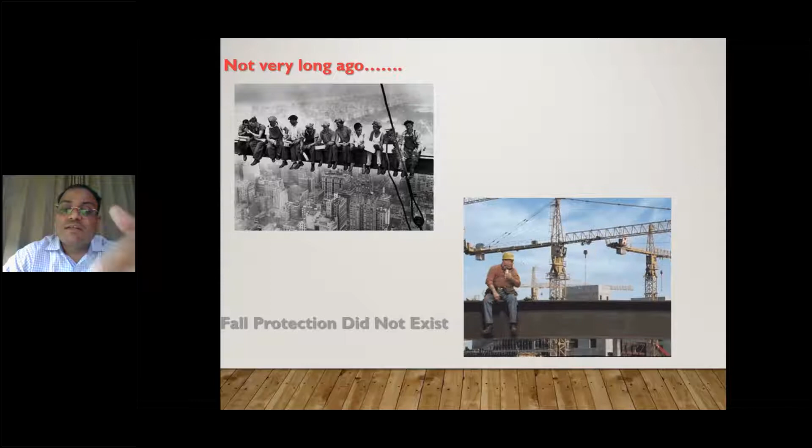I will not take the name, these are well-known places. Many of you must have seen this picture earlier. But what used to happen? There was no fall protection, you can see it in this picture. And the bottom picture, if you see the result, the outcome of that - even today, if somebody goes in that, that is what happens.

So post that, what has happened? There is development in fall protection - the connecting element, anchorage, confined space, safe work at height practices. So fall protection is nothing but ABCDE, right? When we talk about ABCDE, it's A for anchor, connecting element, body support harness, descent, and entry.

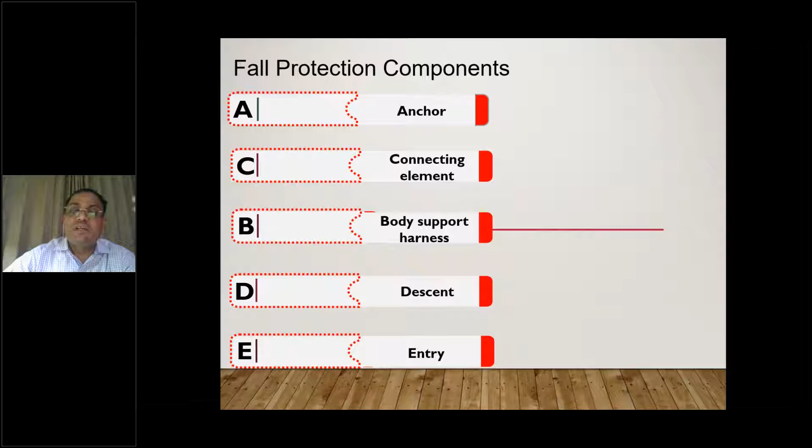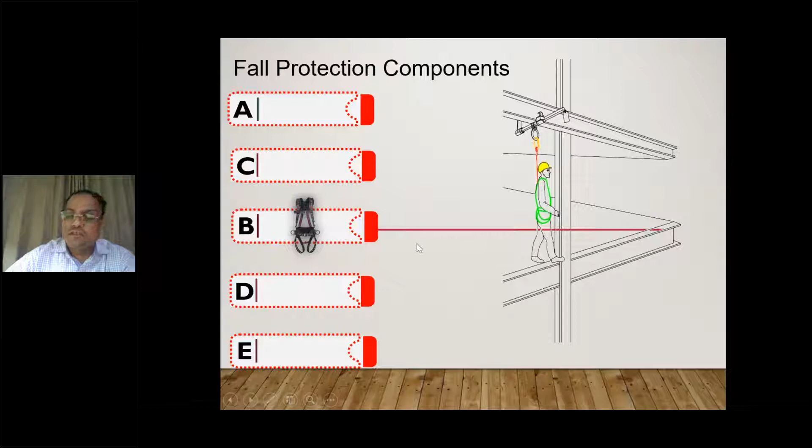That is what we will discuss principally today - what advancement has come in this kind of system. So when we talk about fall protection components, what happens? The first thing is your body support, because first and foremost is the worker who is actually working on this part, right? So he needs to have that body support.

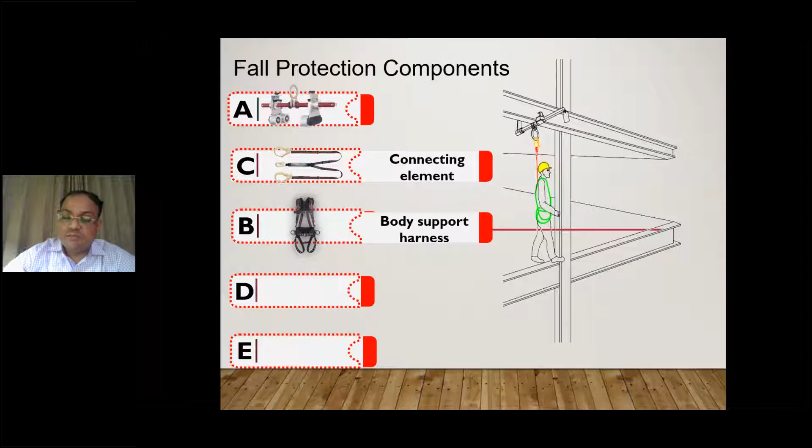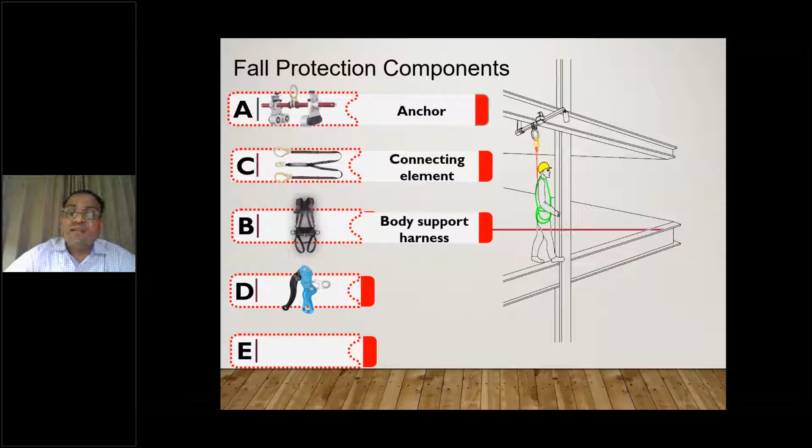So with this body support, what you need to do is attach your body. Then you go on to a connecting element. Once you put up your body support, you need to connect those body support elements, which is harness, connectors, or lanyard - that we'll discuss further. And once you have that lanyard or connecting element, what do you do? You just anchor that - so the anchoring is the third thing, and then you need to work with that.

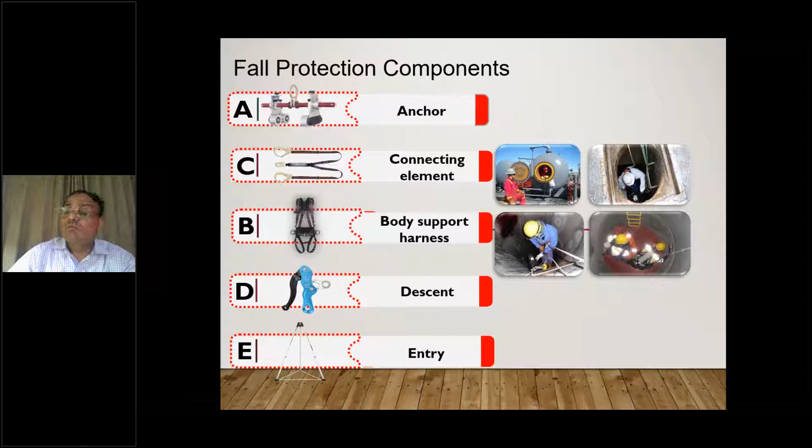So for ascent or descent, you have a descender or descent - that is again an equipment or tool. And then you have certain egress or entry point processes. So when you go in a pit or confined space, what do you do? You have to have some entry process requirement. So these are the basic fall protection components we always talk about - every one of you, I'm sure, is aware of it.

So how has the harness evolved, right? When we were talking about body elements, there is an evolution of harness, because harness is a very basic and first thing which has started, since people thought we need to connect. How to connect? That is your harness. So in this format, the first and foremost thing which came in is full body harness - of course we are not talking about rope binding, we are starting from a later stage.

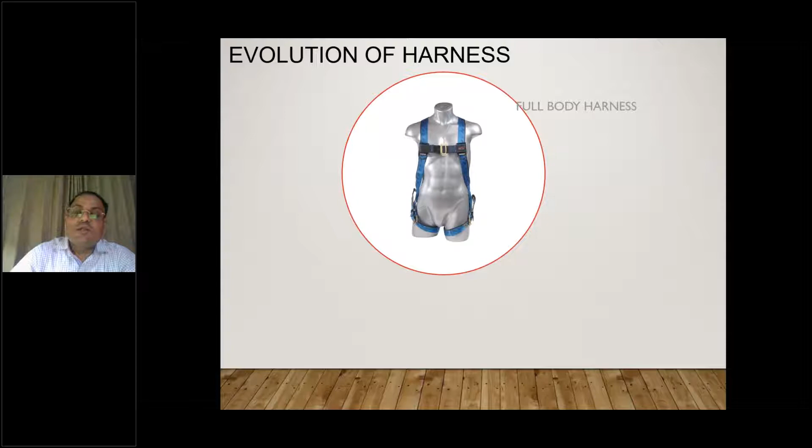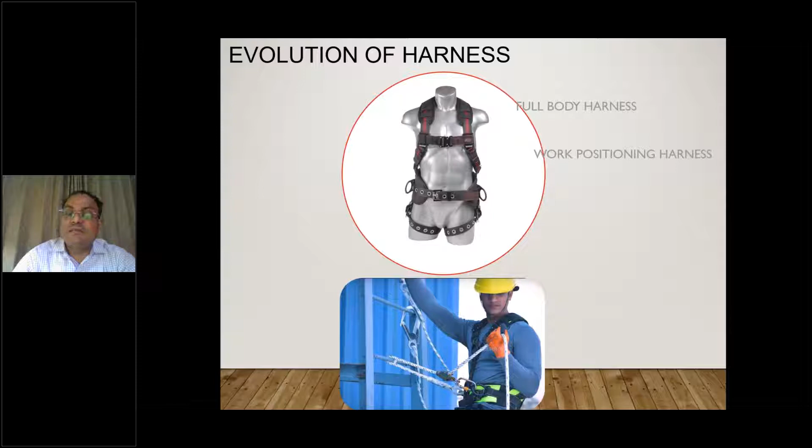Then you come to suspension harness. It means we technologically know if somebody falls, he will have some kind of trauma or some kind of jerk on his body. So if this harness has suspension, it becomes more and more safer. Then we move on to rescue harness, which means you have a rescue element also.

So when you talk about a full body harness, this is also inclusive of rescue. Until rescue things are not there - here you can see a little element which is self rescue, and even there is a connecting element which again requires assisted rescue. So there is a rescue element involved in this evolution of the harness.

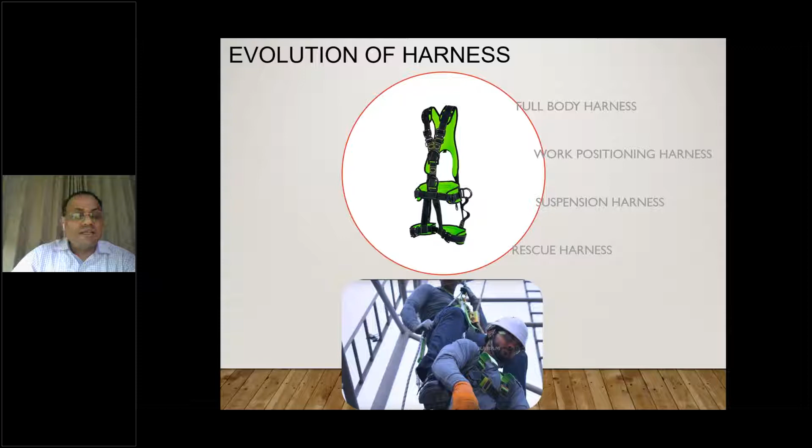Moving on with this, we have dielectric harness and flame resistant harness, which is fireproof, like for welders and other things, because people are going to work, they are not just showcasing the harness. So whatever work they are doing, it has to have adaptability with those elements - like the welding part, you see the flame resistant harness, and dielectric harness for electrocution perspective.

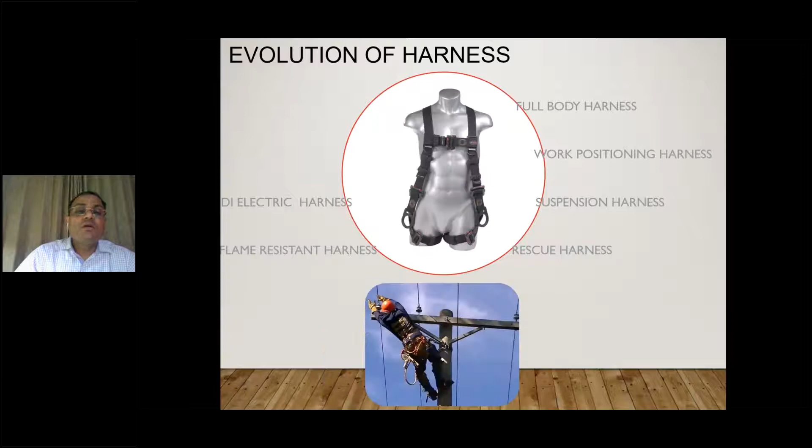Then you move on with anti-static harness, which is for the electronic area component. Wherever there is a chance of static charge and slippage, there is a possibility of anti-static harness. And last but not the least, oil resistant harness. So if you see, the harness itself has become so many things. Full body harness, right? There are 8 kinds of variants that have been developed.

Of course, many industries, many people do not buy those things, because it depends on your requirement, your need, at times the budget, your understanding, and that's why we say at least we as safety professionals must understand what this is. Okay, so if we know these things are available, at least we can choose better, right? So that is what happens when we talk about the evolution of the harness.

Moving on to the next element, which is the connecting element. In the connecting element, again there is a development or evolution that has happened. We all know the lanyard. Lanyard is a very common word now, thanks to our whole industry moving ahead. 20 years back, lanyard was hardly heard, but now lanyard is a common word. Now when we talk lanyard, there are options. First is your single lanyard. Single lanyard is simple: connecting element on one side, connecting element on the other side, connect to your body, connect to your anchor point, right? So that is how this becomes a single lanyard.

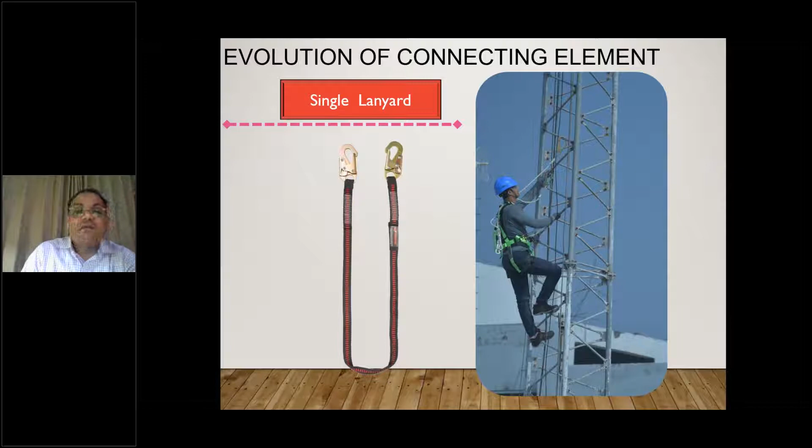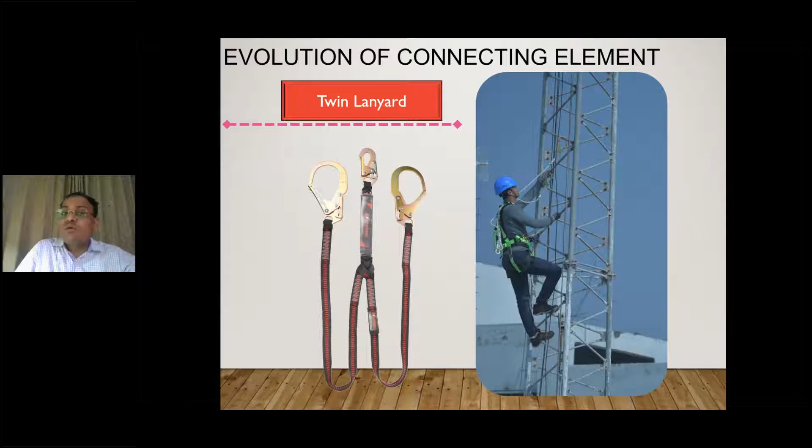Then of course the next step, twin lanyard. Twin lanyard, as the name says, has one basic connecting element to the body and 2 connecting elements to your anchor point. This is something like 3-point contact, right? So whenever you are taking out one connecting element, the scaffolding hook visible in this picture, the other is always connected. So by default you are always connected. The only difference between single lanyard and twin lanyard is you are always connected in twin lanyard, while in single lanyard for those 10 seconds or 5 seconds you are not connected and the chance of fall is much higher. Okay, so that's how we are evolving this connecting element.

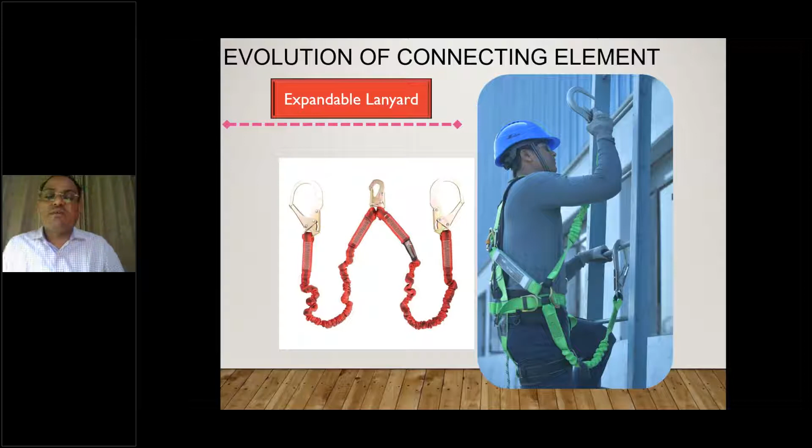Now moving on with the evolution of connecting elements, expandable lanyards also came in. Expandable means sometimes you need to stretch. So how do you maintain this stretch? Because we all know there is a standard length of this lanyard in general, which is 1.8 meter. Now if you entangle that 1.8 meter, you may have difficulty working. So this lanyard has become an expandable lanyard, so that while working in normal condition it is smaller, and when you require it, it stretches to that particular limit. Okay, so the expandable lanyard is available.

Now one more further advancement on lanyards: the internal shock absorbing lanyard. We all know a shock absorber is something which gives shock resistance to the person's body while falling. So if your lanyard itself has a shock absorber, it will protect your body from the jerk. And having two internal shock absorbing lanyards is going to be a fantastic thing for body support.

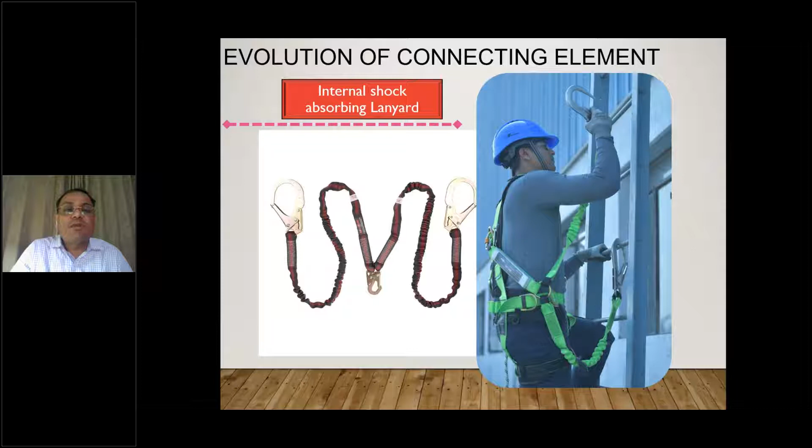So when somebody is working in an oil and grease environment, his lanyard or his harness will keep getting dusty or dirty, and then it will be very difficult to inspect. So that is a very important place where, if it is oil resistant, oil repellent or water repellent, the inspection becomes much easier on this kind of lanyard or harness. Okay. So there is that element.

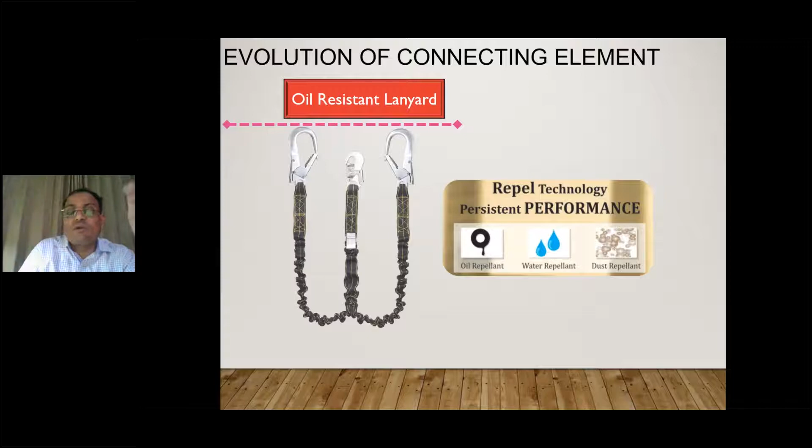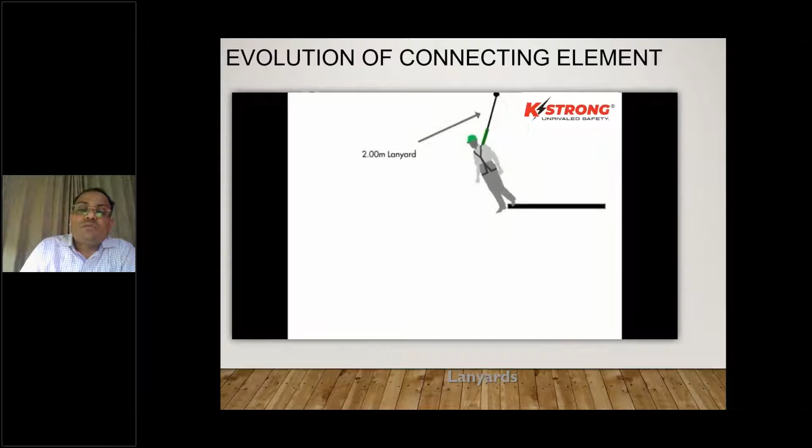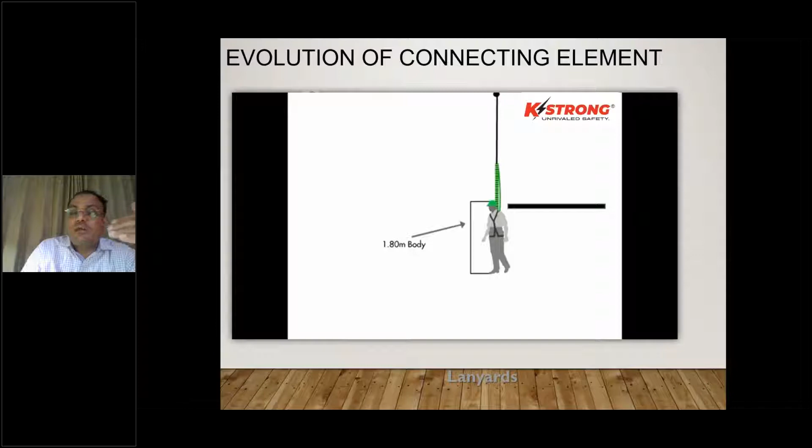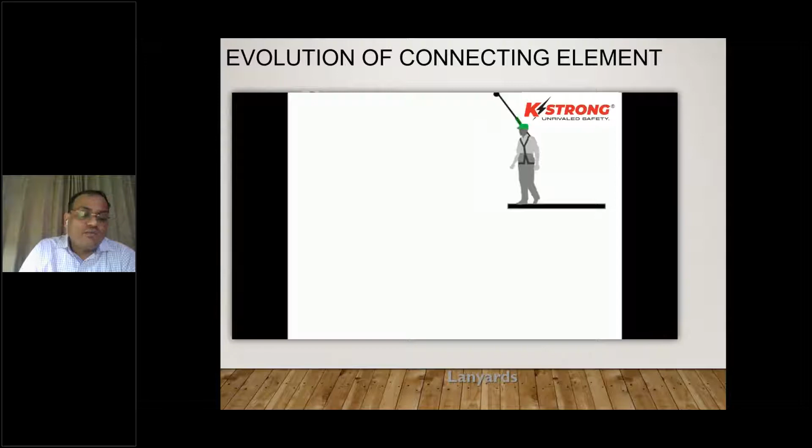Now if you see here, the connecting element, the shock absorption, this is how the shock absorber gives an edge, and this is how it helps the body, so that at least till 6 meters, if somebody falls down, he will easily get arrested. So till 6 meters your harness is good enough to protect the person. That is what we want to explain here. Moving on.

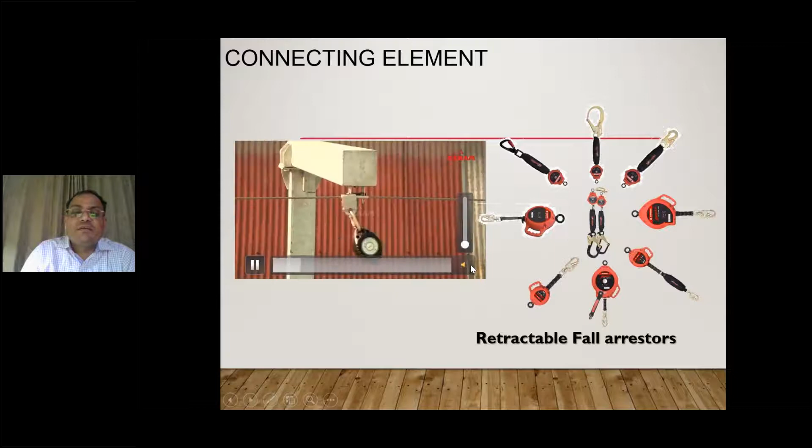So some other connecting elements, for which I will just play the video here. If you can see here, these are the horizontal lifeline overheads. Wherever you have this kind of regular work, people working should always be connected. The whole essence of these videos and pictures is that the connecting element is always critical. So be careful while you are selecting it, and in this kind of scenario you have retractable fall arresters in place, which the right side picture is showing. Moving on.

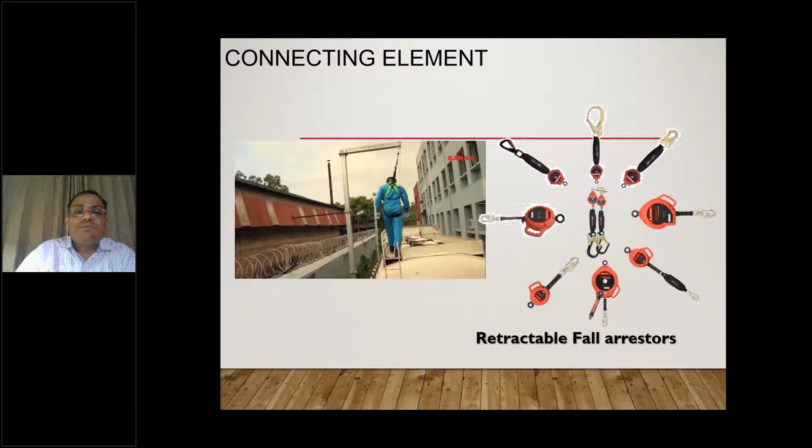Rope grab fall arresters. This is quite a common name; I'm sure most of you are aware what a rope grab fall arrester is. But there are multiple kinds of rope grab fall arresters. On a temporary basis, whenever somebody has to work at vertical heights, he needs to put up those ropes and connect with the rope grab. So rope grab fall arresters are critical in that term. Let's see how the rope grab element works through this small video. So this is how a person connects, falls down and saves himself. Moving on.

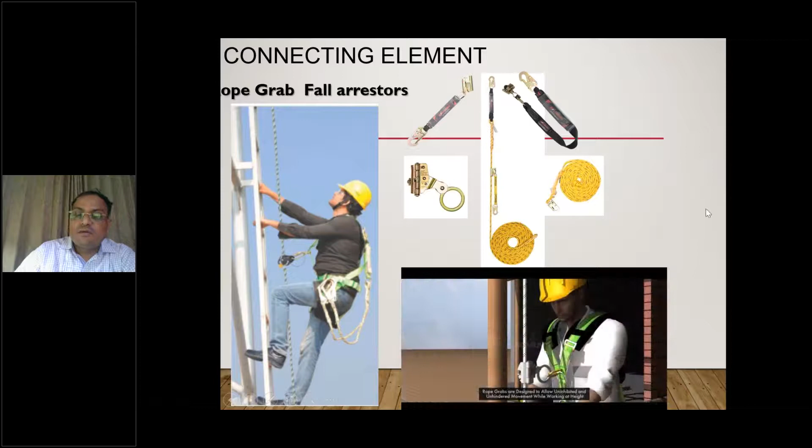When we talk about anchor points, one is the mobile anchor. A mobile anchor is a portable one, where you have a mechanism connected to a tripod or some element. Then the fixed anchor: suppose you have work of 3, 4 or 5 days, or some bigger important work, you fix those anchors in the support wall or support structure and then utilize them. And the third is the continuous anchor.

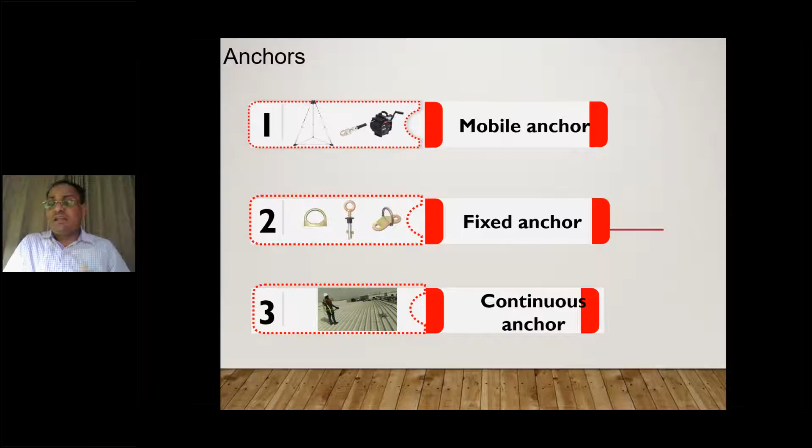There's another application, and a third one. So when we talk about mobile anchors, there are some more anchors, which are swivel anchors, door anchors, toggle, concrete bolt, which you see at the bottom, and parapet. So all options are available. Whatever problem we have, there is an option. The only thing is we have to apply it at the right place. More or less everything is available. That is what we are developing ourselves.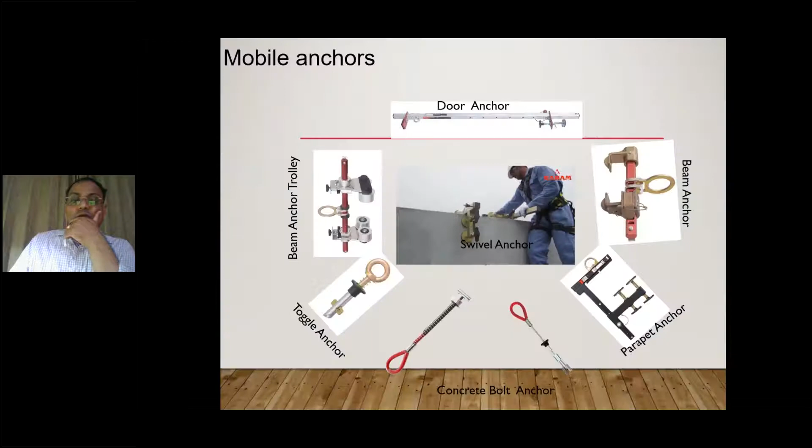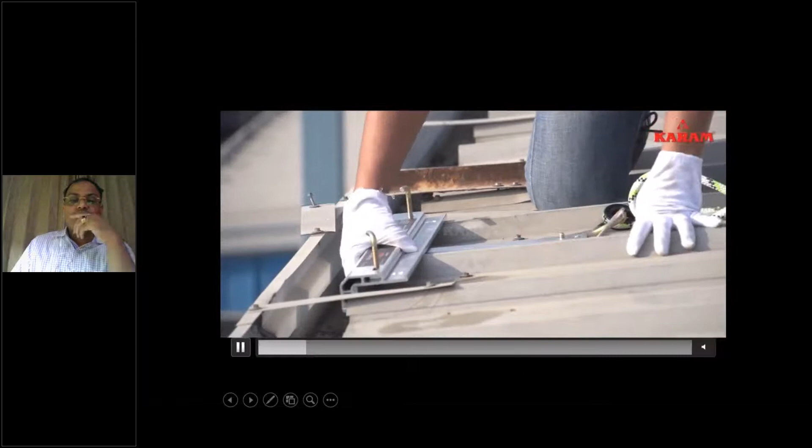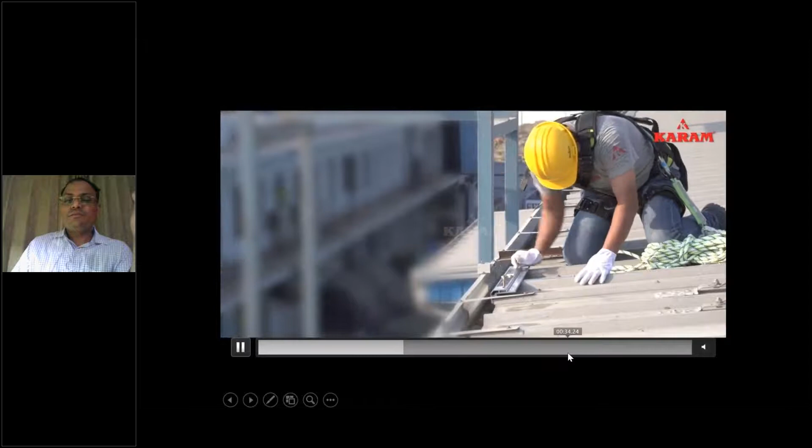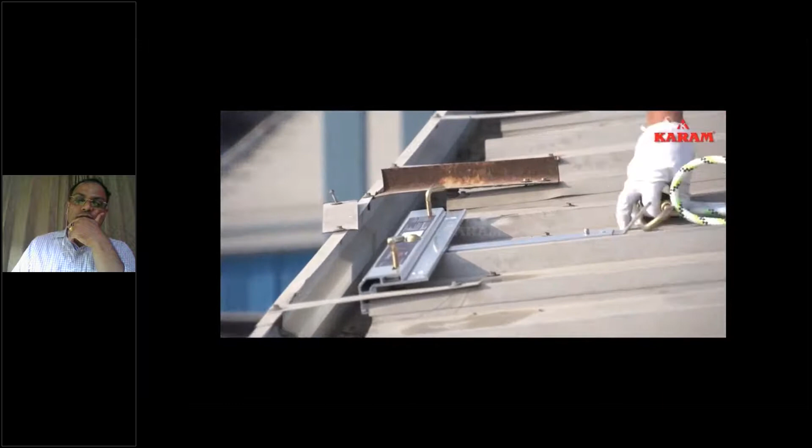So some of the mobile anchors we discussed. I'll just keep this. So you can see for all applications there are different kinds of anchors available. So that is how you can utilize those anchor points. Now I will just keep those videos.

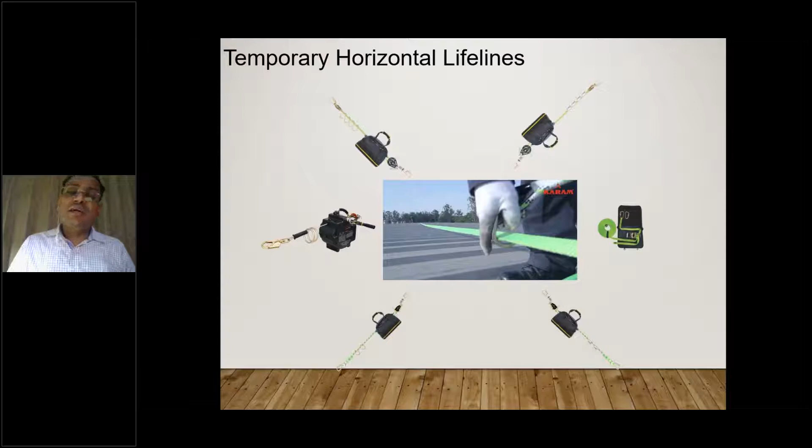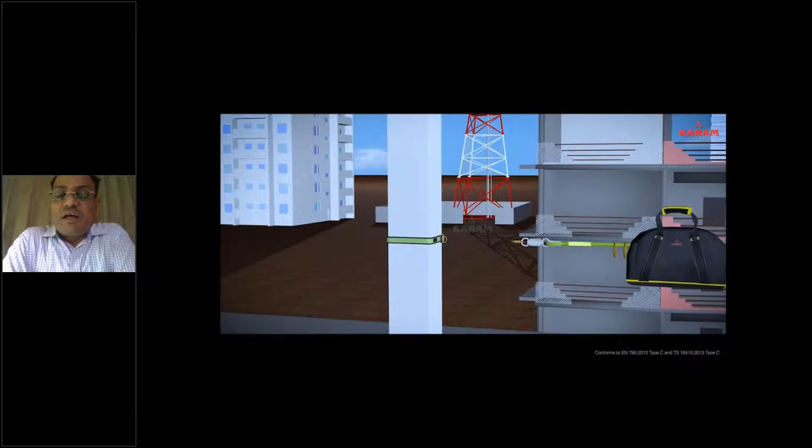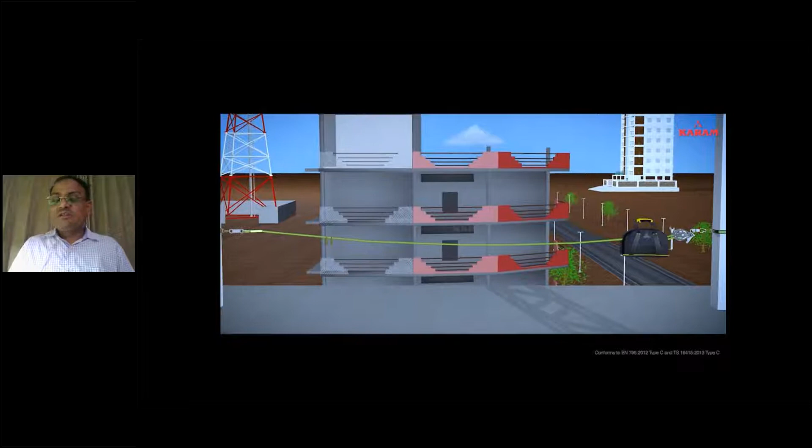Now temporary horizontal lifelines, these are also one of the anchor points. Rope anchorage lines, temporary lines; that is how you try to utilize those available anchor points. So whenever you do this mobile anchorage line, you connect them to the right structures and support points, and then you utilize those anchors accordingly. So that is how things are developing.

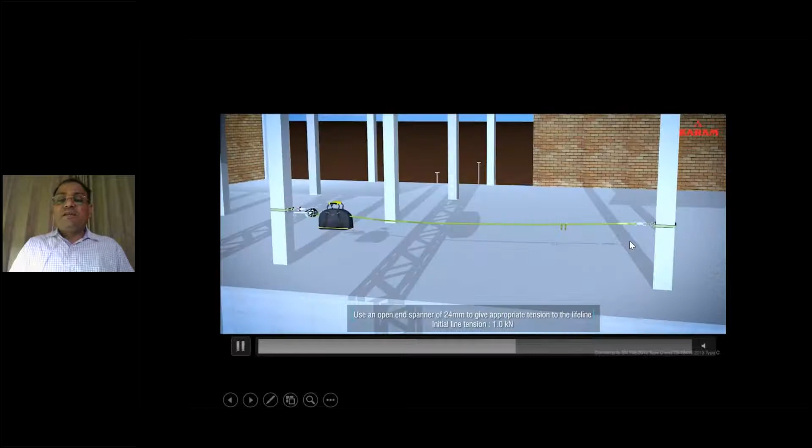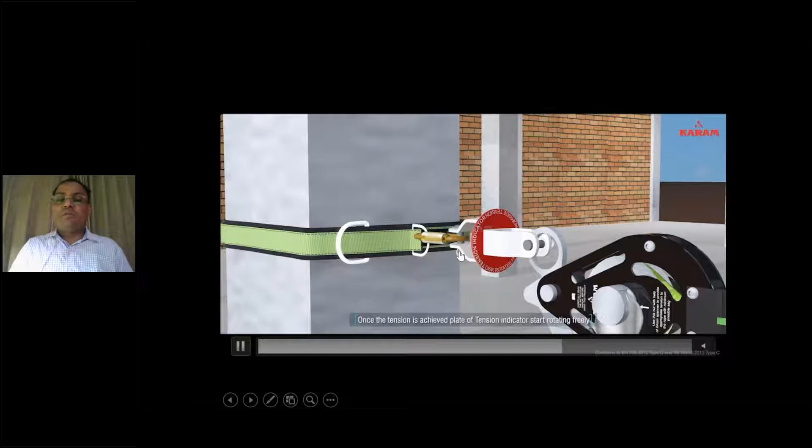Now we will talk about one more anchor, which is very important, where you have nothing. Nothing in the sense you can't have those mobile or fixed anchor points. For those applications you have dead weight anchors. This dead weight anchor is nothing but a counterweight application. A person's body weight is 80 to 100 kg most of the time, and these anchor points can easily take up to 100 kg load, or depending on the situation you can add more, because this counterweight can be increased or decreased.

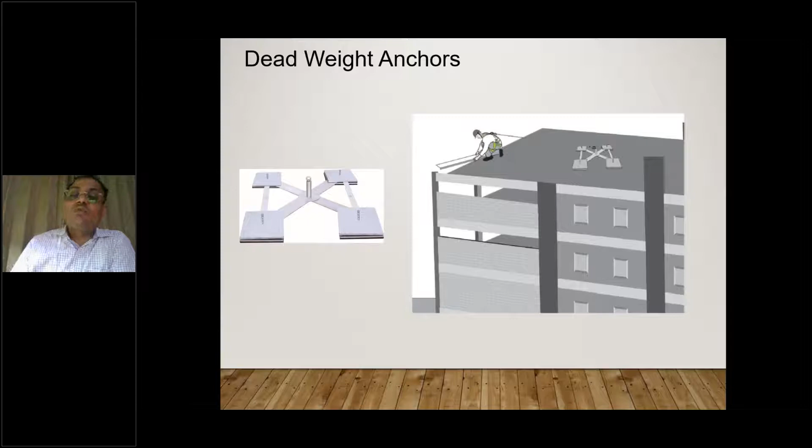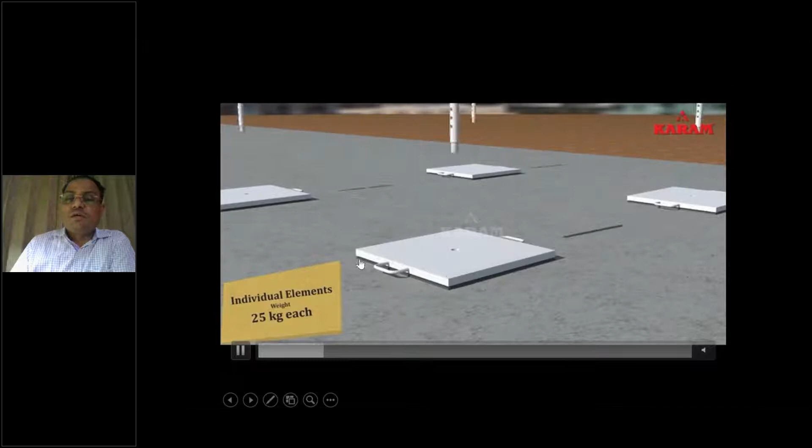So if you put a 200 kg weight, of course the person will easily be able to work with his anchor points. So you can create those anchor points without disturbing anything of the structure. Those things are also available and possible. So moving on, that is how these anchor points can be made.

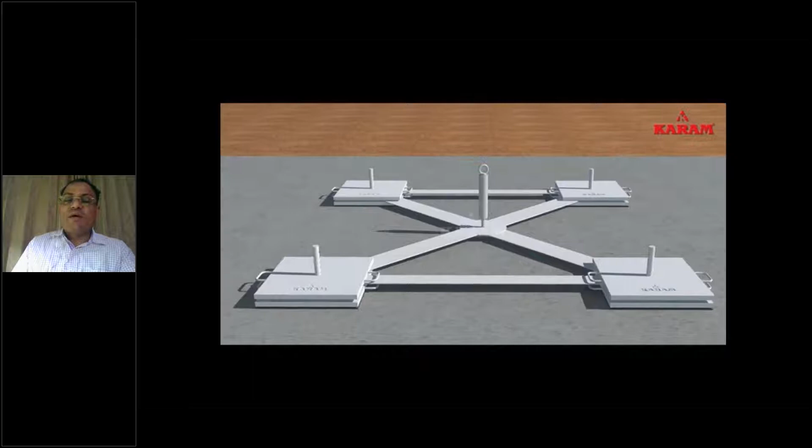So you can see here how easy it is, because these are in parts. Now the development of these parts depends on what your need is, how much load you want to put. If this is a 25 kg block, you can keep on adding, and then start doing it. So it's almost a permanent portable thing you have.

Now when we go further, we have to talk about continuous anchors. What are continuous anchors? These are vertical lifelines, where many times you need to climb multiple times, up and down. There are scenarios like telecom towers, solar and wind energy poles, or electrical towers where we need some kind of climbing day in and day out.

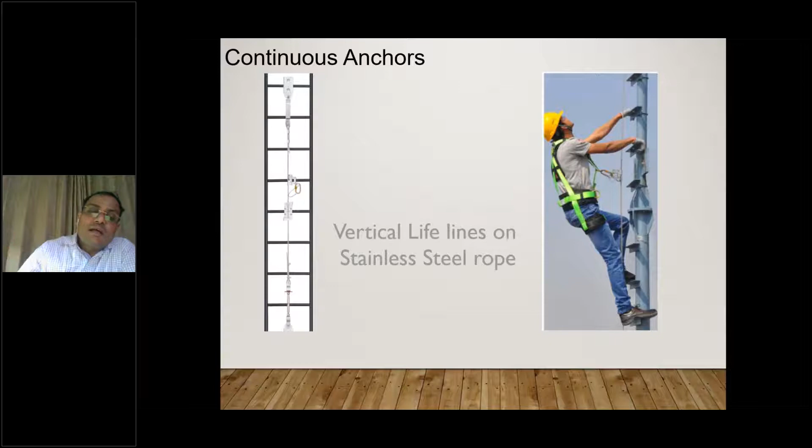The other application of continuous anchor is nothing but a horizontal lifeline. So in many of the industries, manufacturing or wherever we have a pitch roof, because factory shape, if you see, even in pictures, whenever you imagine a factory shape, it's always pitch roof, always inclined. What do you do there? Cleaning, maintenance and other repair works always require access. So in that access condition, we have to have the anchor points to save our people, and that is how these continuous anchors help us.

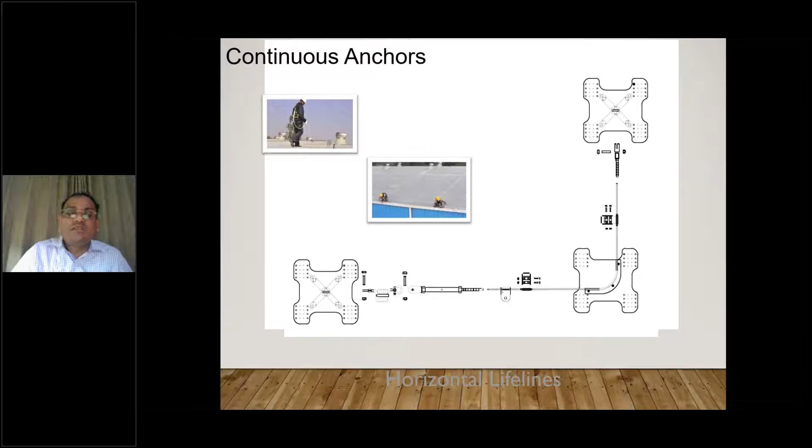So that is the applications. You can see here how people are utilizing this. These bases, what pictures you have seen, are connected to your structure. Instead of dead weight, this is actually connected, so your structure becomes a dead weight here. So basically, principally, everything has a dead weight counterweight phenomena, where either you are connected to a building or a fixed structure or counterweight. Everywhere the body should be able to... that is what we are trying to do in anchors.

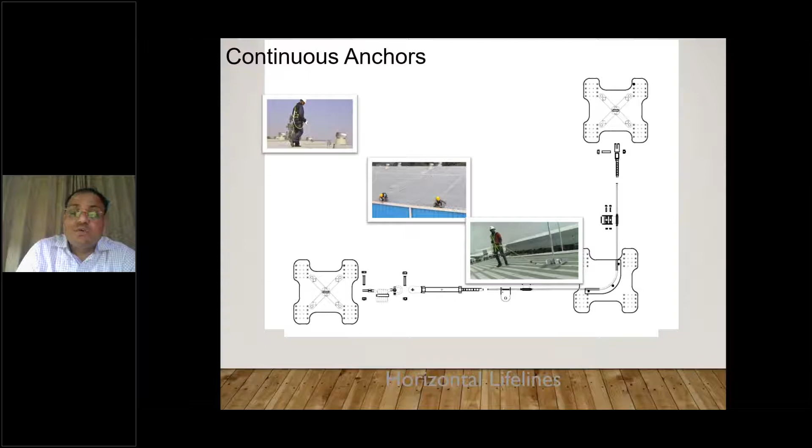But with the development we are seeing day by day, the way our problems are coming, we are evaluating, and we are actually developing ourselves in terms of this anchorage point as well. So that is how we are moving on so far. Now these are the applications. I'll just run through this. Continuous anchors. Now something more we have to discuss on continuous anchors, which is how you utilize them. On the utilization front of continuous anchor, these are some of the components.

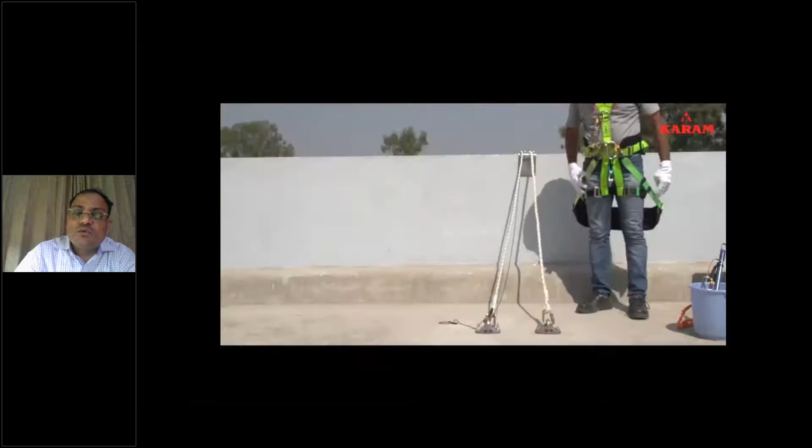So what kind of component? This is your descender. So how do you utilize those descenders? This is how you utilize that application, and that falls under your continuous anchor category. So please watch the video for a minute. That is how people need to anchor themselves and utilize. Now you can see here, this anchor point has been made, structure has been fixed, and the person has to descend down, and that is how he is taking care of his safety.

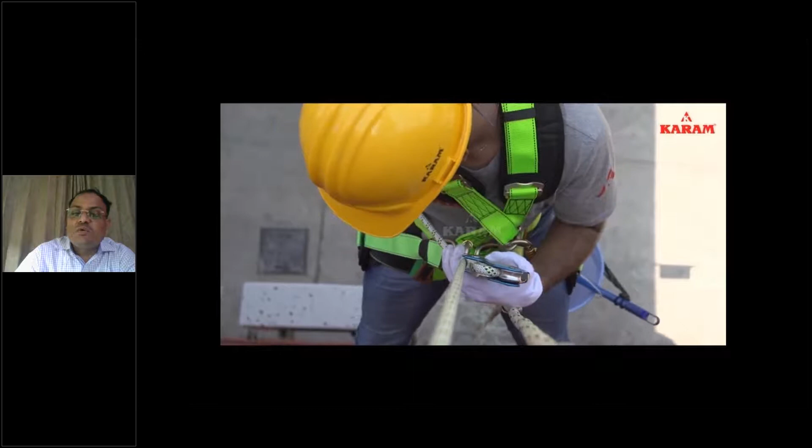Okay, so this is the equipment called descender. That is what he is trying to exhibit here, right? He is creating the loop in the descender itself, so that he can descend himself, and you can see he is descending easily without any support, and he can do his own job at any level of the building, and finally he descends while working, keeps on coming down, and then he finishes the job.

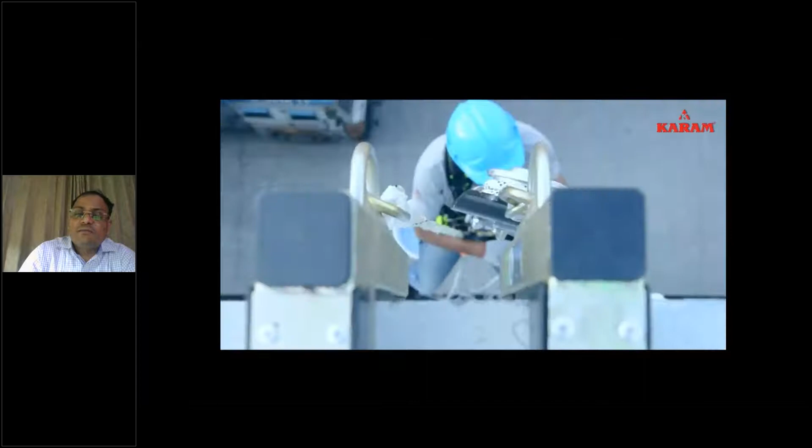So friends, these are the further developments happening, which make work easy, increase efficiency, and definitely the safety of the person. There are some more continuous anchors where people are utilizing those anchors. You can see the utilization. These are mechanical advantage configured continuous anchor points, where he doesn't want to utilize multiple ropes, many layers of rope, so he is utilizing this mechanical advantage easily without taking any extra care of himself.

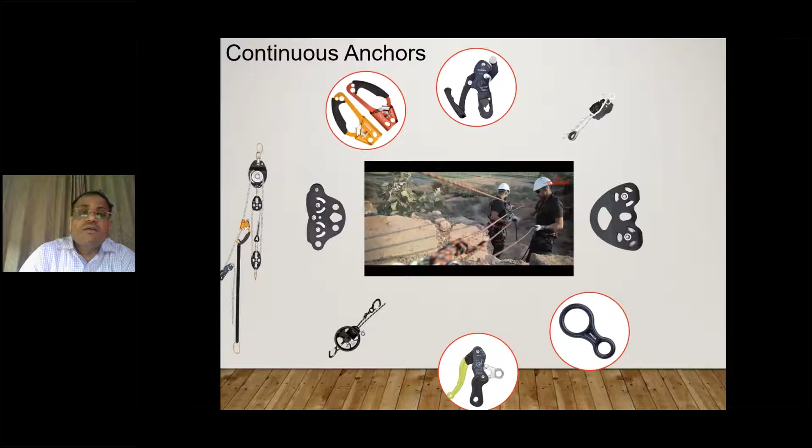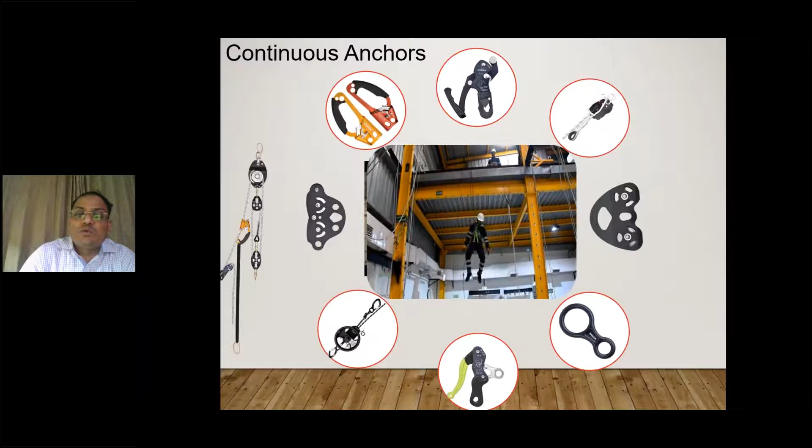Some more continuous anchor outdoor applications, where these kinds of hand ascenders or hand support systems are used, where people do work simply. These are the places where people try to learn, and that is how these things are utilized. These are some outdoor applications. You can see how easy things become for the person to transfer, to unimaginable places, particularly in rainy season or water-filled places. This place is shown dry right now, but if it is water filled, you can't imagine people will go down, and that is how it is helpful.

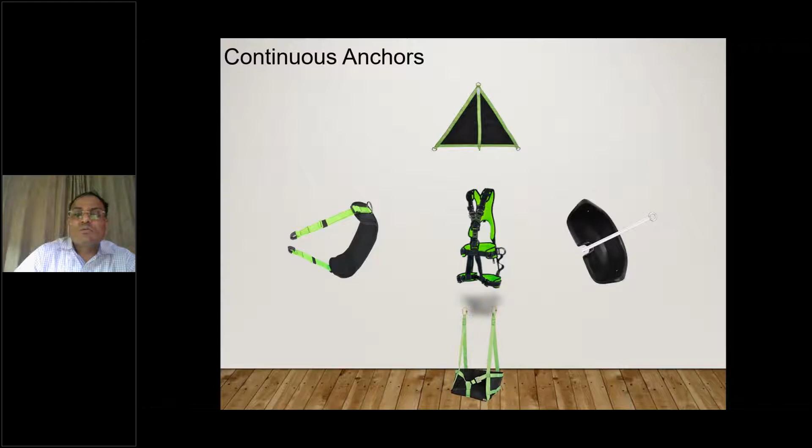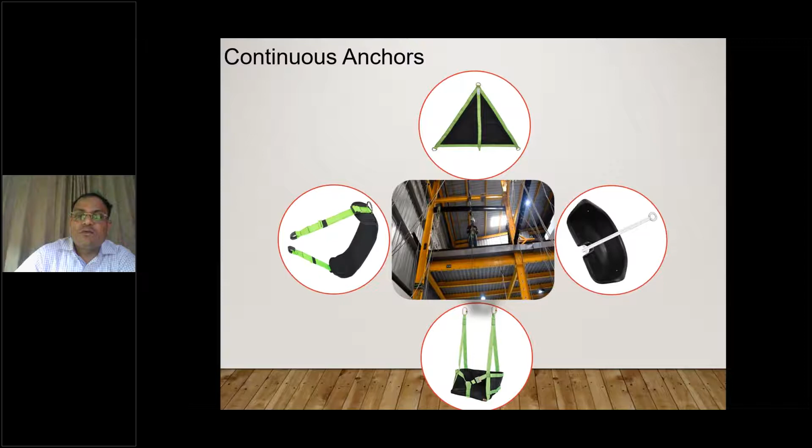Now some continuous anchor applications, where there is some kind of support system the person has to use while using these continuous anchors, right? That is how it has been shown. Now we'll discuss quickly confined space. So what is confined space? Something where people have only one entry and a bigger space to work, and in that space it is very difficult to rescue the person. So how these anchor points are helping us, that is what you can see here.

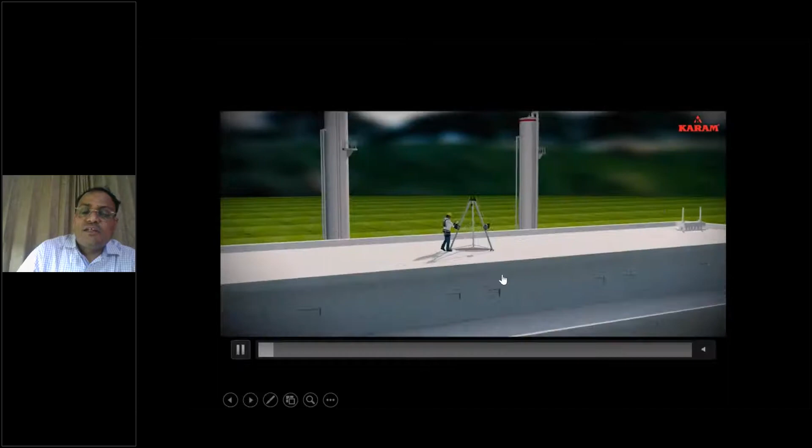So he is entering with that anchor point, winch, right? So now you can see he has entered, and what is this scene all about? Somebody has to enter the pit. He has entered, and now he is going down. Now there is some trouble, right? So what will happen? He faints or he gets trapped. Now the other person immediately got an indication. He is going to rescue him.

How is the rescue happening? You can see easily he is coming out with the winch machine. That is the power of these machines and tools advancement. Earlier a lot of people, our mine workers, used to get trapped. Now with the help of this equipment, we have a lot of help taking people out safely.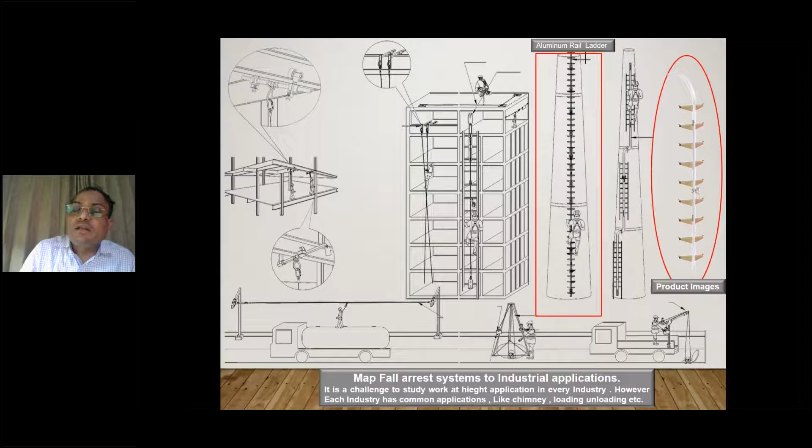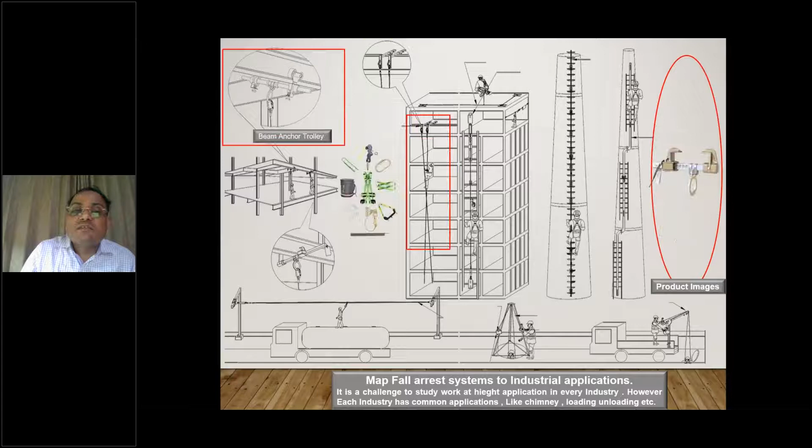Okay, so friends, I'm summing up this work at height part, then after this I'm going on the material lifting portion. So these are some of the structures where your fall arrest system is always required, be it any kind of application. So one by one we'll see here. You see aluminum rails, fall arrest system, ladders, vertical lifelines, horizontal lifelines, HLL over rooftops, then other things, parapet anchors, your beam anchor trolley, other anchors. So that is what we have so far.

Before I go on material lifting, let me just quickly sum up for you. We have discussed very basic things here on the advancement of work at height, positioning yourself, how you anchor yourself, because ultimately anchoring of the person is always required. From any unprotected edge or any height work, he always needs to be connected, he always needs to be protected. And how we do it: we connect our body through a lanyard, and that lanyard is connected to the anchor point.

Now those anchor points, we have various kinds of anchor points: mobile anchor point, fixed anchor point, temporary anchor point, continuous anchor point. So majorly three broad categories, which are mobile, fixed and continuous. In continuous we have various applications, mobile we have various applications, and fixed we have various applications. So far this is what we have in our system, in India at least. Okay, now we'll move on to the other section, material lifting.

Now material lifting or rigging, what is this all about? You are thinking that the person is going to work. Now the person is not only working, he is also carrying the load or equipment at times, particularly in the solar industry, wind power or telecom, they have to carry particular loads. Now how do they carry? Either they carry by hand or they pull it. So is it possible to pull every load by a person easily? That is what we will discuss, what kind of advancement is helping us in material lifting processes.

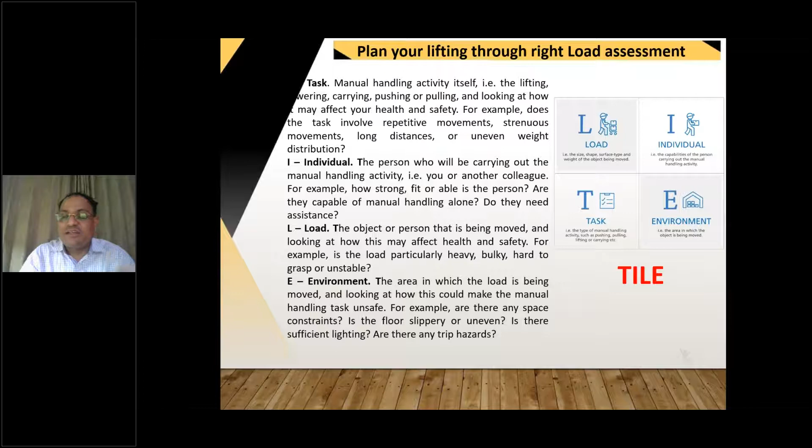So when we move on, what advancement has come? So far we all know how the lifting issue is coming up. Advancement means when we talk about lifting, how does it become easy? It becomes easy only when you use these equipments.

So one by one we will just explain to you here. This is something we have just explained to you earlier, the descender, again descender, and these are the equipments.

Now one by one let us understand descender. What is descender? Descender is nothing but helping people to ascend and descend with a single rope. This material is aluminum alloy, anodized, and ideal for descending on a single rope. Please mind you, it's a single rope. It is equipped with a unique self-braking system that initiates braking as soon as the handle is released. So accidentally, if somebody releases this, it can easily lock itself.

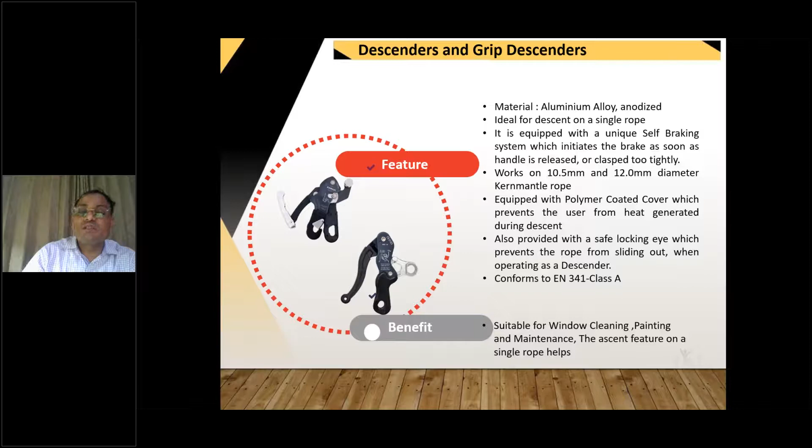So friends, now we'll talk about adjustable webbing foot. What is webbing foot? It is a 44 mm polyester webbing which has a connector, and the underfoot strap is abrasion resistant. So you put your foot inside and connect, then make your up-down movement with that. That is what adjustable webbing foot is.

This is something, the features of rope clamp or Jumar. These are names, but this is actually helping your person to pull the rope, because many times you may slip those pulleys, rope, and it may slip out of your hand. So this is helping you - by definition it is a clamp which clamps together the rope and wire. And again it works on 10 to 12 mm rope.

So you can understand, when I was talking about pulley, I took an example of 10 to 12 kg pulley. Even in rope, similar situation - your rope which comes as a 100-meter rope comes at 10 kg. A similar 100-meter Manila rope or bigger jute rope will become much heavier. So that is why we are only talking about 10 to 12 mm rope.

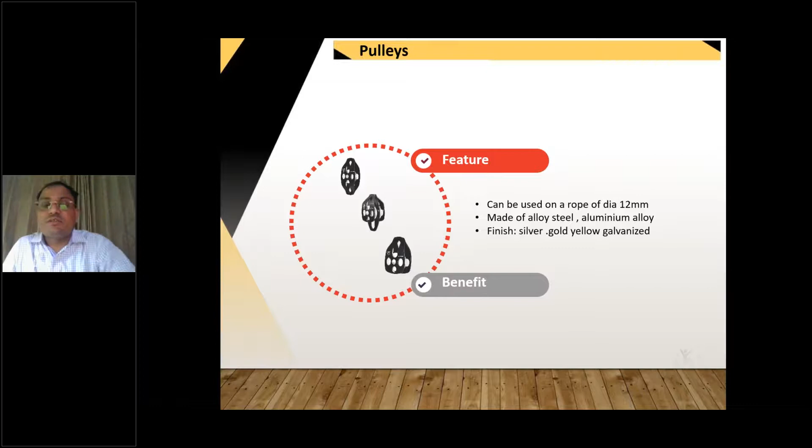Some of the other pulleys, double pulleys as we call them, can be used with rope, 12 mm, and other features. Now double side double attachment pulley - these are the further advancement where you want to take mechanical advantage with higher breaking strength. Double aluminum anchorage pulley cover, double pulleys allow you to achieve mechanical advantage, right?

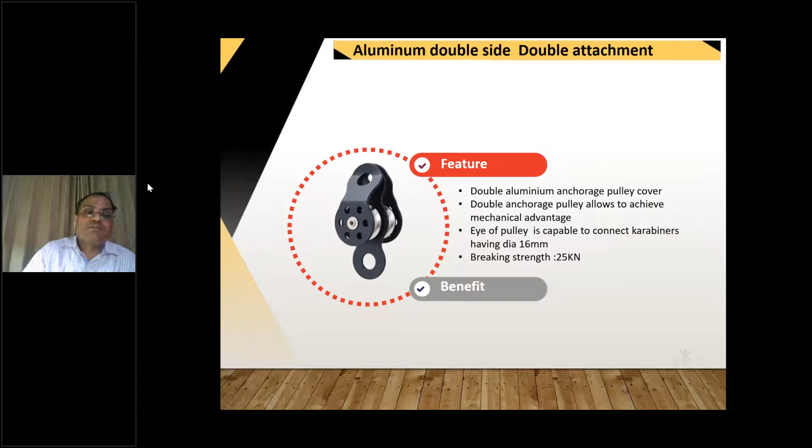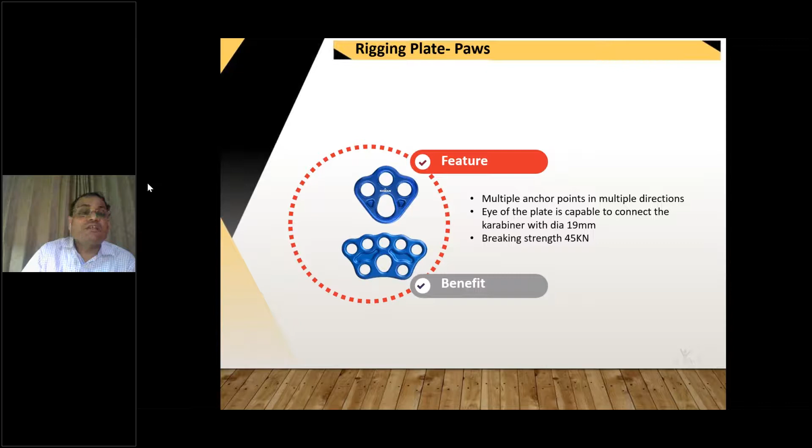Moving on, some of the rigging plates are part of this equipment. They are used for multiple anchor points. If you want to make a multiple anchor point from one anchor point with good breaking strength, these are the support systems available to you.

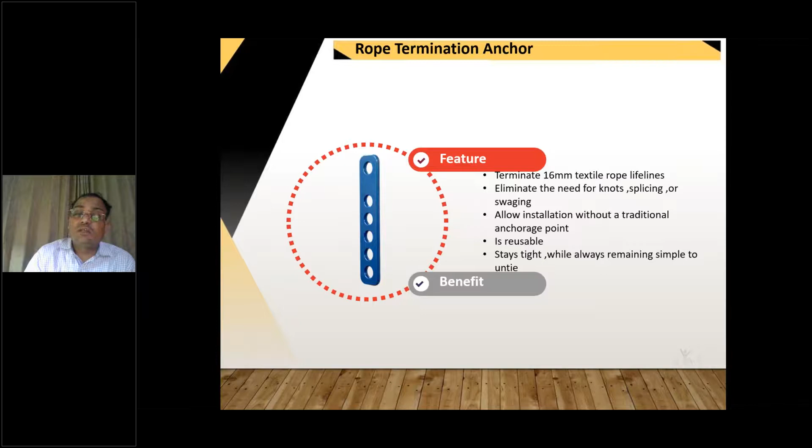And these are the rope anchors, rope termination, where at one point you want to put your rope. Material lifting standard equipment actually utilizes this kind of termination anchor.

This is something called the Komfy Kruze, which we have seen in the earlier video, where mechanical advantage becomes very easy for you. It works on the principle of winding contact friction and allows the user to raise and lower himself, so he can ascend and descend, both in the same option.

And with factory fitted hauling, you can also go by factory fitted terminal rope. Earlier you used to try to ascend or descend with effort, but now these are the effortless techniques we have available with us.

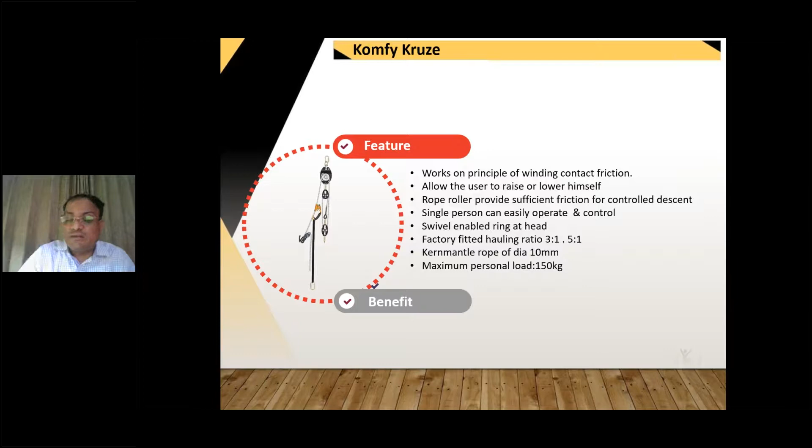Some applications of the power winch, either petrol version or electric version, where in greenfield sites we have nothing and we have to lift the material, we use a power winch. Let's see the video quickly on how we utilize these power winches.

I'll just run through it quickly. You can see this.

Sorry for the inconvenience. You can see how easily one person is actually lifting a big heavy load, a very difficult load I would say, because volumetrically it has different issues altogether.

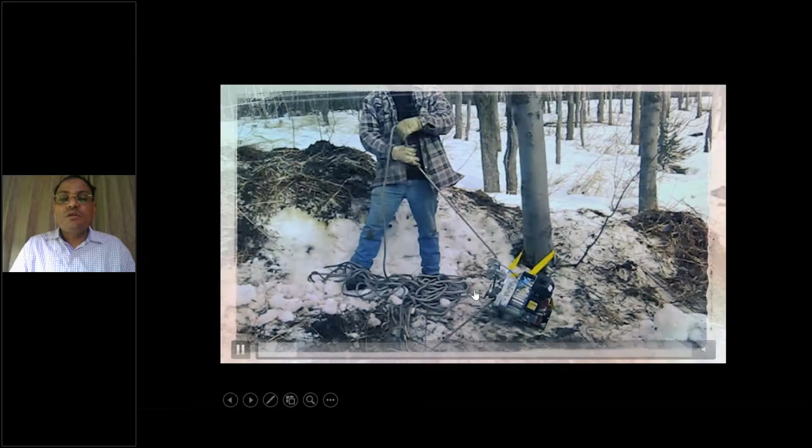So these are various other applications where multiple... I'll just skip ahead in the interest of time. You can go through this later; it will be live on YouTube anyway. So I'm skipping this video for now, because we have to talk more about material lifting.

So now, why are we talking about knots? You can say it's simply a rope, but what is the advancement? The advancement is how easily you can make your knot, and this knot actually decides how easily you can lift or descend the load.

These are some of the knots with their nomenclature: alpine butterfly, black hitch, bowline, whatever name is mentioned here, you can utilize. Now why am I showing this picture? Because if you see, there is a reduction in strength of the rope due to the knot.

If your rope knot is not correct, there are typical strength losses. What kind? If your scaffold knot is not right, it becomes 23 to 33% weaker, a loss of strength. So it is important to utilize those rope knots correctly. Equipment utilization done rightly is also important and critical. That's just to explain this to you.

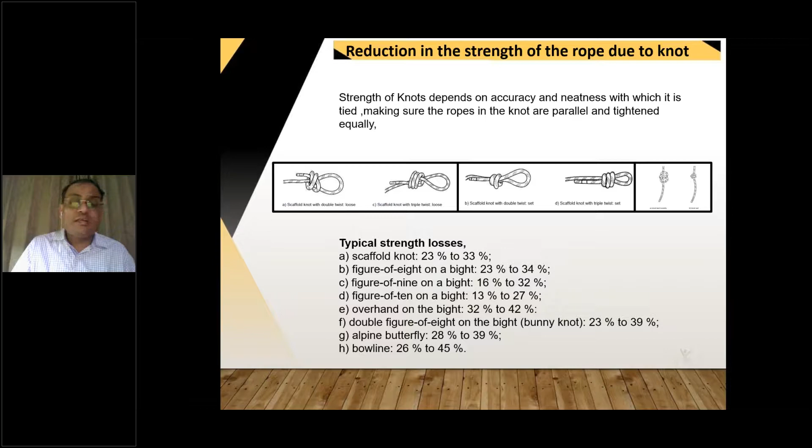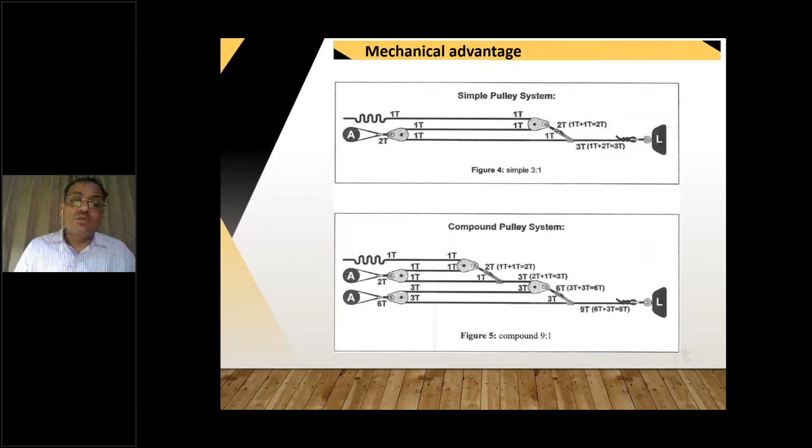With a very small space and the help of the equipment, that is the advancement we are talking about, how you can take advantage of machines to save the human. We talk about robots, but not every place is robotic or automated, especially in the greenfield places we are talking about. Everywhere robots are not possible, maybe for at least the next 10 to 20 years. By that time we have to utilize all these things, we have to utilize the right resources in that sense. That's why I thought to express this to you.

Now, any thoughts? Maybe the chat box is open. I am through with this presentation. I really enjoyed explaining it, so thank you very much. Julie and Mohit, over to you for any questions if we have.